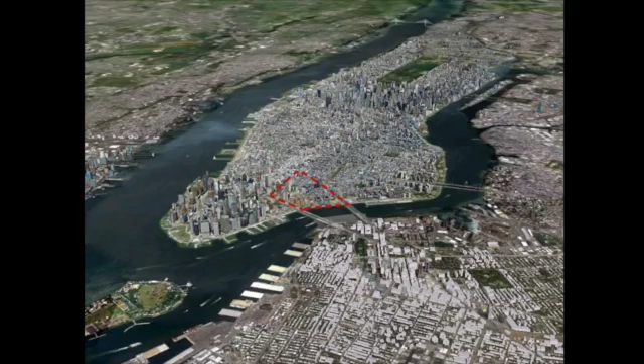We started by looking at anticipated flooding in this area, where it would go and what that meant. You can see in the medium dark blue the 6-foot sea level rise that's predicted, and then in the lightest blue, the 24-foot storm surge that would accompany a Category 4 hurricane.

What would happen is that water would come in from the left from the Hudson River and then up from the East River and converge on our site. We overlaid that analysis with the historic location of Collect Pond, which you can see in the middle in dark blue, which was the original fresh water source for New York City, along with all of its neighboring streams. What you see is that where the water wants to go today is actually where the water had been before.

To make this happen, Collect Park is designed on the premise of removing the seawall along the East River. Today, the East River edge cannot naturally respond to sea level rise.

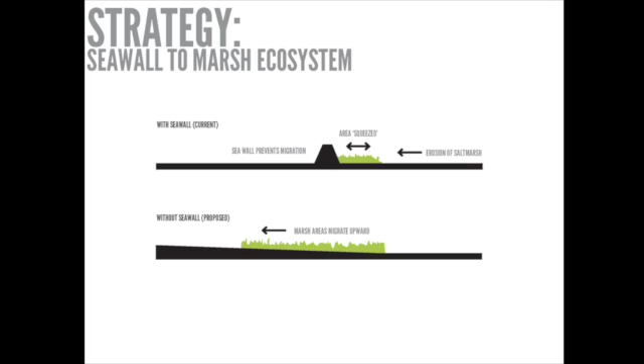The existing seawall continues to create a false sense of security and actually speeds up the erosion of any barrier landscape that would appear. So without the barrier, the natural buffering marsh ecosystem will appear.

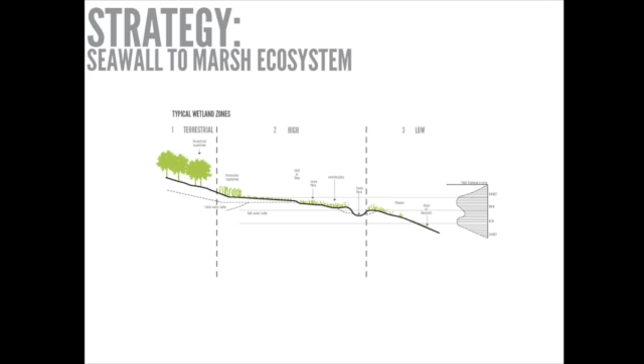When you allow this to happen in a typical situation, three ecologic zones appear: a terrestrial zone, a high marsh, and a low marsh. The cohesion of these three zones allows this system to work seamlessly and functions to buffer storms, allow tidal changes, filter pollutants, and provide natural habitats.

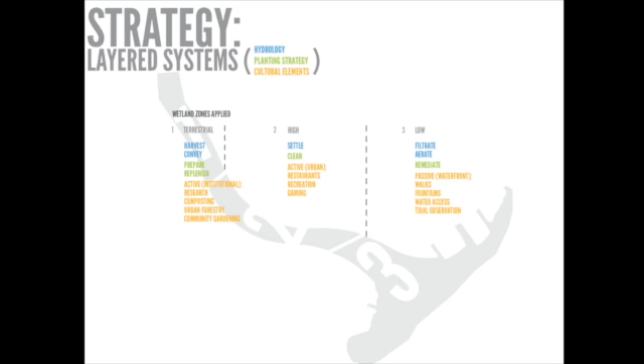So Collect Park, outlined in dark gray behind, became a system modeled after the function of these three naturally occurring ecological zones. Each zone—the terrestrial, high, and low—is multi-layered, not only to respond to hydrology and plant ecology, but also to the cultural and programmatic needs of this community, which is the Two Bridges neighborhood in New York City.

You can see the master plan is a direct translation of these designed elements. Up at the top, number 1 is the terrestrial zone, which captures and conveys stormwater. Number 2 in the middle is the high marsh, which receives fresh water. And number 3, along the East River, is the low marsh, which filtrates and aerates the water in this more constructed and managed marsh condition along the river.

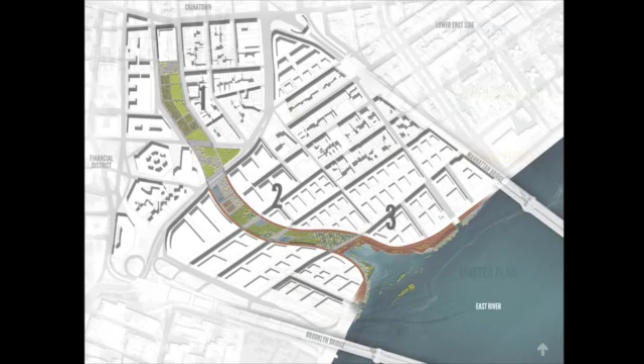We took each of these systems and broke it out and developed it further. Hydrology became the core defining system, closely paired with a planting strategy, and also a significant index of cultural elements to connect back to the neighborhood.

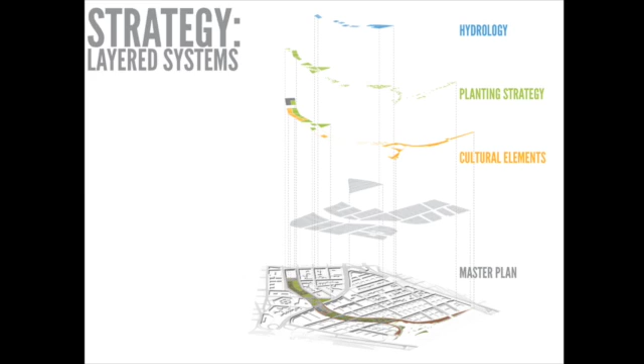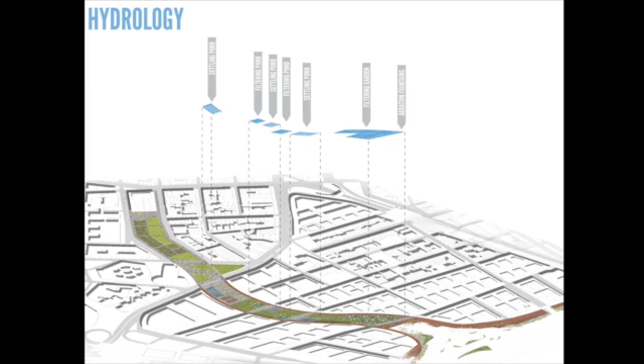Hydrology was really the main core infrastructure, designed to accept rainfall from above and accept flooding from below. This diagram shows we designed alternating settling and filtering ponds to accept rainwater, and then the constructed marsh, down on the lower right, accepts the floodwater that would flow up Collect Park.

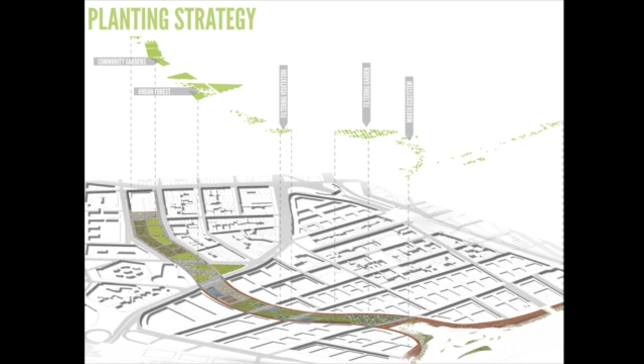We also introduced a phased planting strategy, characterized by responsive growth and management throughout the park. The terrestrial vegetation included an urban forest, capable of being transplanted after a flooding event to replace lost vegetation, and the marsh ecosystem at the bottom eventually gets pushed upland as sea level rise occurs.

The plants were chosen specifically for their transplantability, salt tolerance, and growth rate, and we cross-referenced all those to find a perfect match. The trees grown in the urban forest would be able to be replanted to replenish lost vegetation after a flood and begin the remediation process of any polluted soil and sediment.

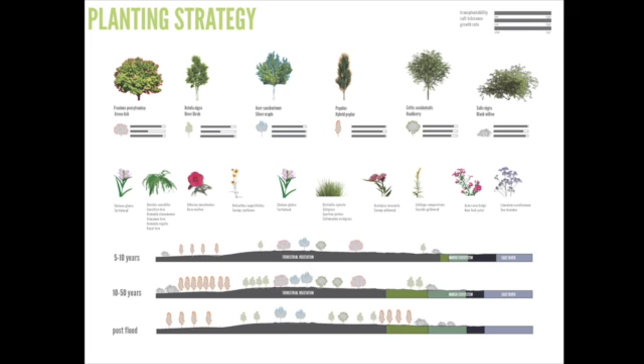We phased that, as you can see in the diagram at the bottom, and this was a representation of that phasing. In 5 to 10 years, you have the islands off the edge of Collect Park initially, and then between 10 and 50 years, you have the marsh condition, which moves in and takes over and becomes the buffering landscape.

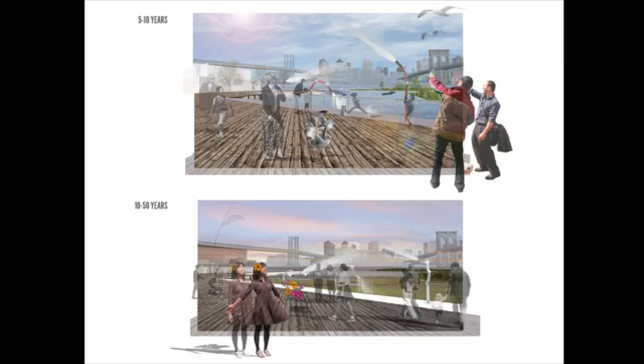We also introduced a number of cultural elements, including a newly activated edge with a kayak launch, docks, a promenade, and an interactive fountain which also aerates the water before it goes into the East River. Then we have plaza space in the middle for farmers markets, outdoor space for residents and employees.

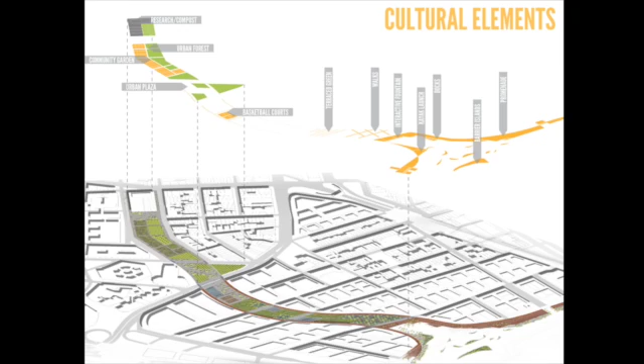We introduced some sport fields, multi-sport fields. Here you can see the farmers market location.

We also proposed the location for a climate change research center, which would serve as a hub and a partner for an urban agriculture initiative, which would include greenhouses, indoor composting, and community gardens as well.

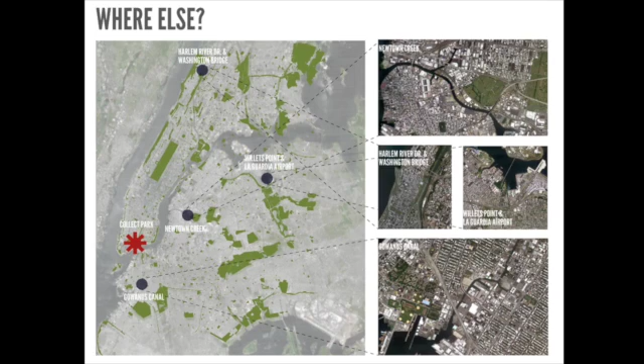We recognize that sea level rise is obviously not an issue just for Lower Manhattan, so we used Collect Park as a prototype for similarly threatened neighborhoods in New York City, and we located other sites with similar issues such as Newtown Creek, the Harlem River, Willets Point, and the Gowanus Canal, which could all utilize intercity green infrastructure as an innovative solution to the consequences of sea level rise.

This is the Barcelona Pavilion, shown in its natural habitat. The two types of tourists I saw were those enjoying the beautiful afternoon and the physical environment of the building, and then there were the architects who were laying on the ground taking pictures from a worm's eye perspective. I was completely confused by this because there literally were people laying on the ground all over the place.

My contribution in the lobby for the GSD 075 exhibit juxtaposes abstract animations from my first-year studio at the GSD with footage from Extreme Home Makeover. The point of this, as described in the text that accompanies the exhibit, is to provoke us into reflecting on the consequences of generating a culture of architecture on our own terms that operates outside of the economy of the built environment. While I think an internal dialogue is necessary to advance the discipline, I think it's worth keeping in mind that this is not always directly applicable to the project of building.

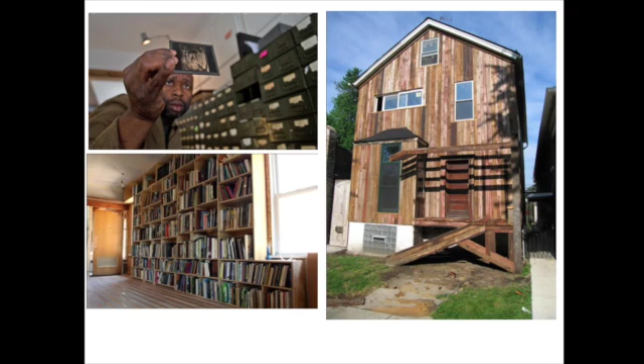He rehabbed the abandoned building into a library containing 60,000 art history slides that were being thrown away by the University of Chicago, and the entire collection from Prairie Avenue Bookstore that went out of business, of art and architecture books. Four of us went there over the summer to work as architectural practitioners. He gave us free housing, almost no money, and total creative control. So it was a very challenging and rewarding summer.

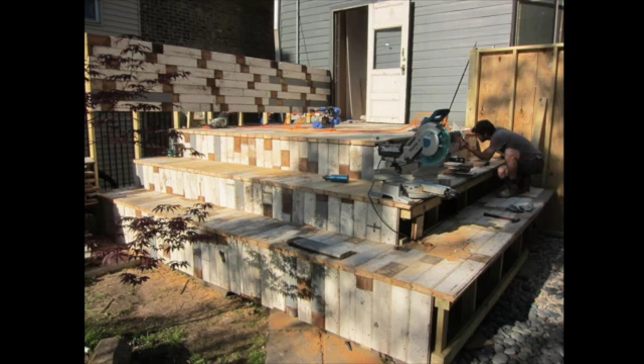The ethos that runs through all of this comes from his art practice, where you find something discarded and turn it into something else. So these were floorboards from his studio that became a back deck. And the back deck in this backyard became a movie theater for an artist residency that took place over the summer, for the neighbors to see lost films that the Chicago Film Archive was curating, displaying, and showing to people. We were trying to bring this kind of cultural activity into a neighborhood that rarely sees that kind of work.

This routine site work we had to do for a future construction site was the removal of a 100-foot rotten silver maple. Instead of just letting this kind of banal act go unnoticed, we turned it into a several-week-long camp for the neighborhood kids.

Because as designers, we're constantly representing sort of unspoken narratives, we decided that we could use this as an opportunity to speak the narrative of the ecology of a neighborhood like that, and have the kids learn about the parts of the tree, talk about where wood comes from, talk about where paper comes from, and think about how to play differently in their own backyards.

And so that's actually a piece of the tree. For the week leading up to it, we did activities with them every single day that had to do with learning about different parts of the urban ecology right around their own homes, and also the animals that live there, and thinking about the way that it was a member of their community.

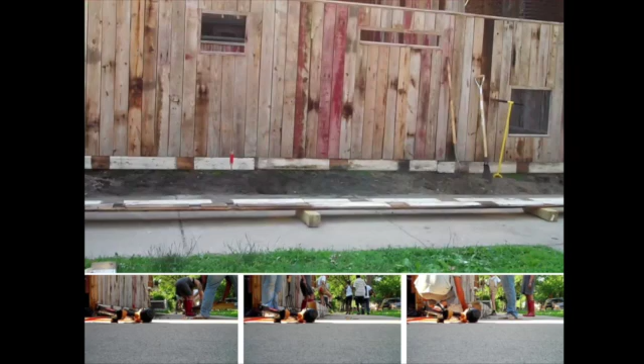And we tried to endow them with some sense of systems thinking, of finding treasure out of trash. This discarded little strip of dirt in front of the fence, we decided, could be a demonstration garden for low-maintenance perennials.

Doing work in front of your house on the South Side, people will constantly come ask you questions, like, what's that? What are you doing? What are those plants? It was just this moment where we could share all the knowledge that we had about planting and using discarded materials to create something more vibrant on this block that was kind of just littered with flaming hot Cheeto bags.

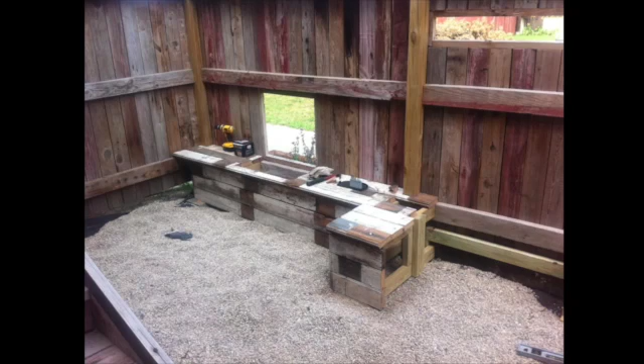So what else? This piece of dirt on the other side of the fence is in front of the library, and it's this pseudo-public space that we just decided really needed to be something more, especially for an organization that functions as both private and public space. Just a little bit of framing, the rest of the cladding from the deck, and a cubic yard of gravel. We were trying to find a way to make it a viable space for neighbors to come and hang out without being invited in necessarily.

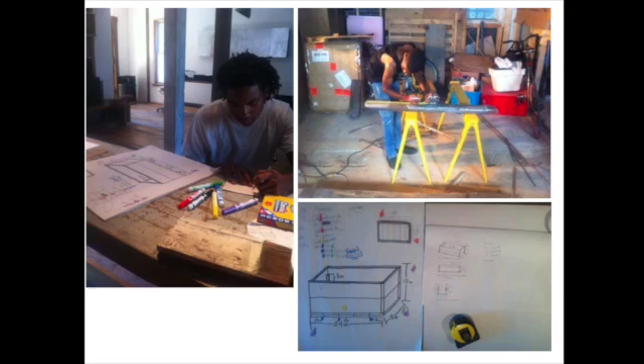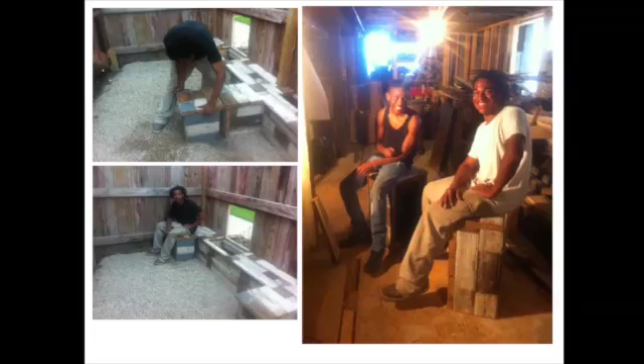The design and building of this included hiring two neighbors from down the street, a 16-year-old and a 19-year-old, who rather than just paying them to lug around wood, we treated it like a design build workshop. We had them draw their ideas, switch their drawings, and build each other's drawings. They stayed late for hours they weren't being paid, and it's amazing how quickly you can make somebody become totally anal retentive and perfectionist about what they're building. They had never picked up a power tool before, and by the end they were cutting and recutting, tearing apart things they had made if they weren't satisfied, and rebuilding.

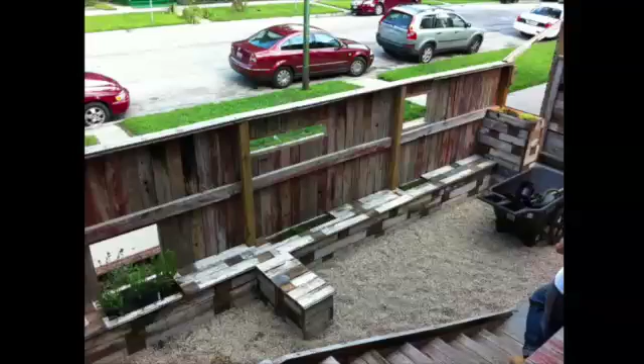So really looking at architecture as community service, my insight from the summer is that every single moment of architecture can be neighborly, didactic, and transparent. It can be a generative process throughout every design stage and every building stage, and you end up with a really rich product that is also a shared story and a shared history in a community where people have participated in its conception and its building.

There's an outdoor classroom where there was nothing but dirt and mosquitoes, windows where there would normally be a fence, and conversations where there would normally be silence. It can transform vacancy into vibrancy, yard waste into keepsakes, nothing into something. So I would like to leave you with the idea that architecture finds abandonment and sees opportunity.

As a graduate of this school, I'm happy to be here with you today. I'm going to speak about an ambitiously modest design-build project from my practice, inasmuch as it illustrates aspects of my research and publications that deal with energy as a formal topic in the discipline of architecture. There are a couple of key observations.

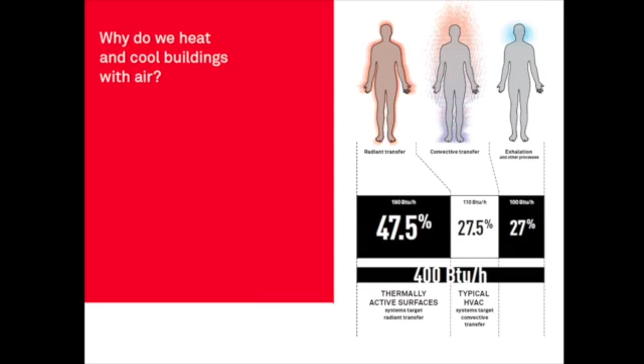Why do we heat and cool buildings with air? Our physiology strongly prefers radiant transfer, and our bodies work this way because water is about 800 times more dense than air, and you can capture and channel much more energy with water. As such, our bodies are thermally active surfaces, and it is my view that buildings should finally occupy the same thermodynamic space as our bodies.

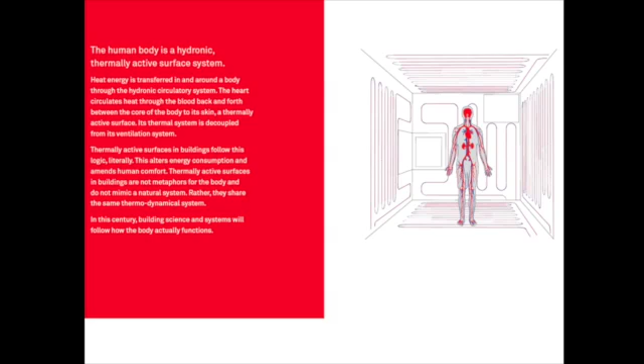The book thus asks what happens when the surfaces and structures of architecture also become the primary energy system in buildings, that is, when architecture begins to do much more work.

My current book project focuses on aspects of architecture that have been untempered by the discipline, such as its extensive supply chains and material geographies, that also tell us something about building physics that have been overlooked in the 20th century. These untempered milieus can grant much new agency and specificity to architecture.

For instance, while the stunning glass architecture of the Toledo Glass Pavilion, which is coming up, produces some beautiful spaces, its supply chains are vulgar inasmuch as they squander opportunities to enrich the building and the larger collective that we live in through productive feedback loops that can make architecture do more as a form in this century.

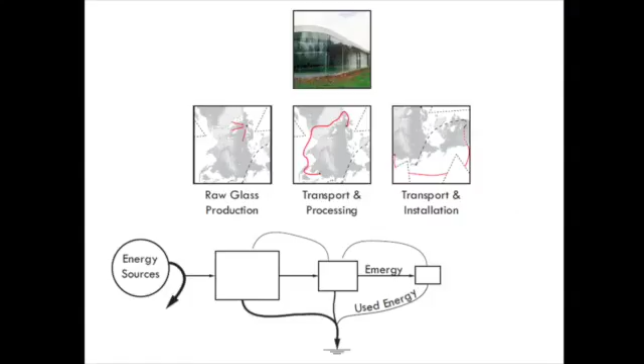So with some of these thoughts in mind, we can go to the middle of nowhere in Colorado and look at the Stackhouse project that sits on a hill and overlooks the Arkansas River Valley and the 14,000-foot collegiate peaks beyond. The building is seemingly simple, a couple of wood walls with steel boxes that frame particular views in the adjacent landscape. There's not much to see in the drawings of this small building.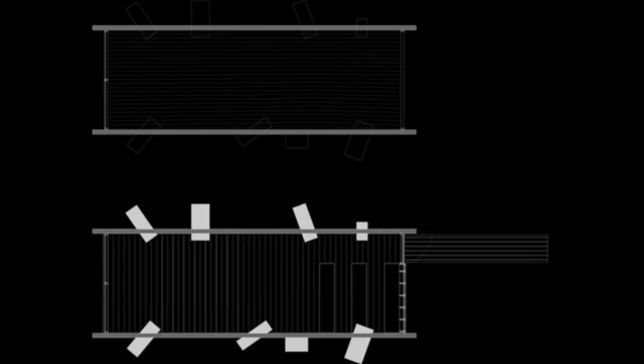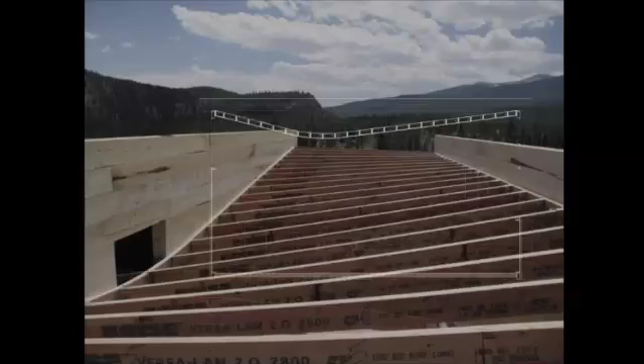Most of its intricacy is non-visual. The roof, however, is a ruled surface, which means that every joist is different than the one before and after it. So one side of the roof is dead flat, while the other side has an asymmetrical belly leading to a scupper. This allows the roof to drain snow and rain to the scupper as a single architectural surface.

It also made the roof part skate park during the construction. Underneath the asymmetrical belly of the roof, it casts light about the interior, and it also bounces sound in a particular way as a space for performance and music.

But it is the assembly of the building that is of most interest to me. The walls for this project are a single layer of solid 6x8 spruce timbers that are the structure, enclosure, insulation, and finish materials of the project. All of the wall's demands are converged in this one layer, an approach that runs counter to prevailing logics of construction and energy systems for buildings today.

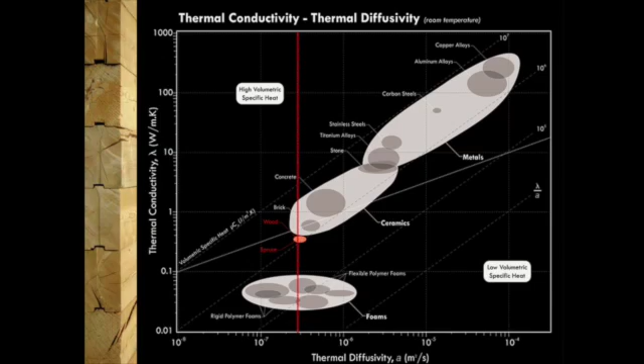Once the timbers are stacked, their thermal performance becomes important. The spruce material is quite interesting from a thermal point of view because its cellular solid composition puts it somewhere between an insulator like a foam and more conductive materials like stone or steel. This thermal diffusivity, a parameter often ignored in contemporary building science, plays an important role in the Stackhouse.

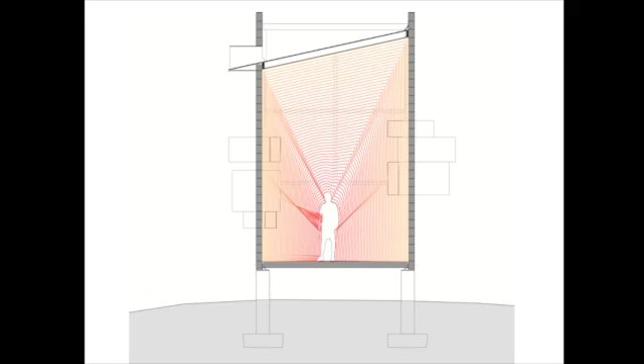Although this building would fail to meet any energy code, the owner can sit inside wearing a t-shirt and shorts with no heat source other than the sun in mid-February when it is 10 below outside. How thermal energy behaves in wood and how our bodies relate to wood helps point to an alternate modality for thinking about the relationship of energy and architecture.

But there are other forms of energy at stake in this project. Consider a more conventional wall that has a series of processes attached to it, some quite energy intensive, that collectively produce a rather dispersed material geography that is rarely considered by architects, but nonetheless inextricably attached to this form of architecture. In this case of lumber construction, it would yield a relatively high embodied energy value.

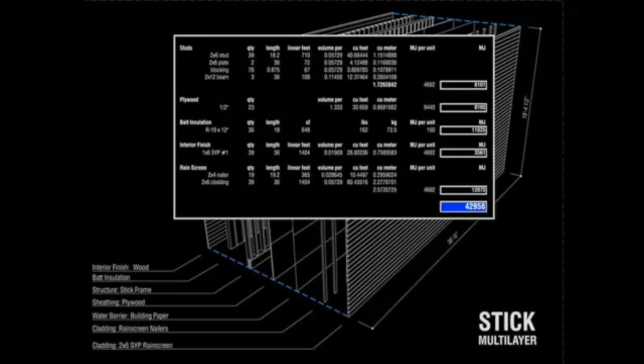In the stack approach, however, the single material allows me to know much more about the wall. For instance, the spruce for this project was grown, harvested, processed, and installed in the same valley as the project, and as such, it yields a much lower embodied energy value.

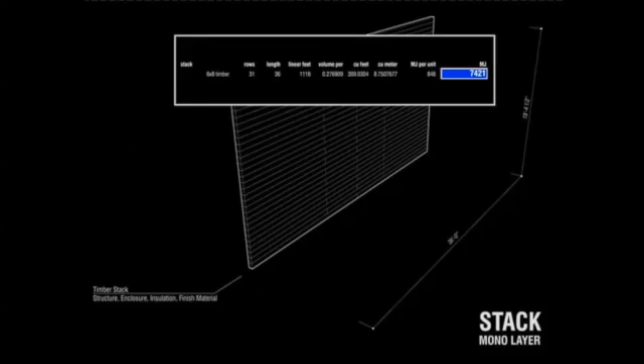But I'm only interested in these sorts of facts in a very marginal way. What is of greater concern to me as an architect is how these facts can affect the building. In this case, more money, material, and energy was lavished on the building than its externalities. It also enables specific architectural qualities that would otherwise be precluded.

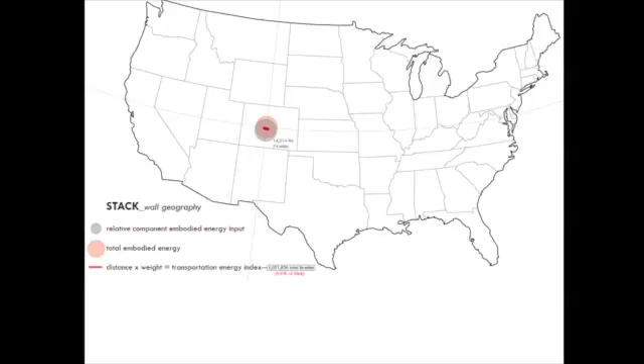Yet my disciplinary concerns can nonetheless address some larger issues in the world. For instance, wood is the only building material that sequesters carbon. As a tree grows, it absorbs carbon, and that carbon is locked in the material until it decomposes or burns.

If you deduct from that capacity the carbon required for all the materials in this building, then you end up with a surplus of sequestered carbon in this case. In other words, this net zero building sequesters about twice as much carbon as it took to build.

But again, I'm only interested in these facts in as much as they yield some more agency and specificity for architecture. This building works the way it does not because of any efficiencies. It is a massively inefficient use of material. So it fundamentally reflects an approach to architecture not based on ideas of scarcity, but rather one that aims for abundance and exuberance in architecture.

And this occurs because its ecological facts are byproducts of its disciplinary choices. From the molecular realm of building physics to the territorial realm of its extensive architecture, there's much to be gained for architects when they temper these otherwise untempered environments.

So as Rem Koolhaas once noted, the architect, for better or for worse, relates to the city like a surfer to the wave. But architecture and architects do not yet relate to the world like a surfer to the wave. They do not surf the wake of the materials and energies that presuppose the formation and construction of any building.

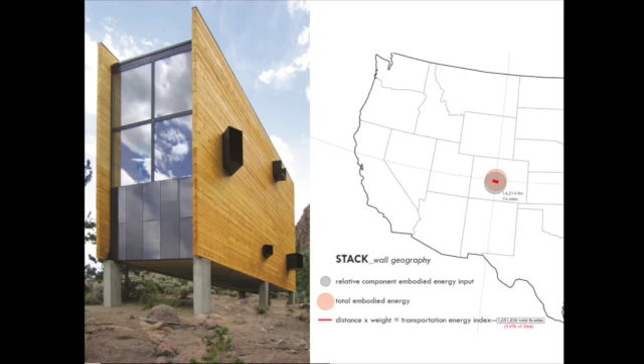I see this formation of energy itself, how architects shape forms of energy, towards some greater end, first and foremost as a formal project within the discipline of architecture. It can yield non-trivial forms that can trigger great abundance and exuberance for both architecture and the qualities of life in this century. Thank you.

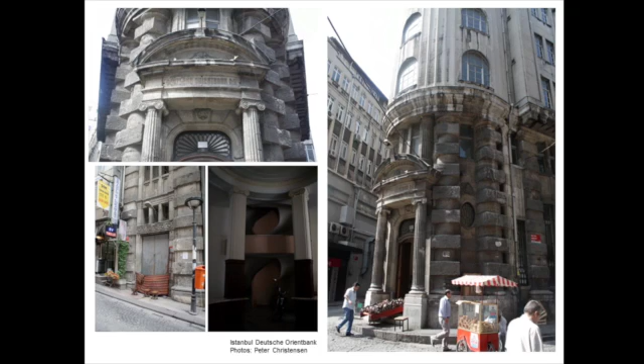It explicated, rather, German ideas of the primacy of land over water, of the necessity of geopolitical alliances, and a shifting belief that the cradle of civilization lay in the Middle East and not in Greece. The built components of the railway read, like their archives, as texts, which I hope have the promise to make an original contribution to architectural, art, and geopolitical history, and hopefully one day the ingredients of my first non-museum publication.

When I explain this project, as I have so often done in the last few years, the reaction is typically met with two types of responses. The first, from my academic peers, who ask probing questions concerning specific figures, ideologies, or historical debates. The second, which I may call the grandma and grandpa question, is, so what? My knee-jerk reaction after a few years of academic indoctrination is to say there is no, quote, utility for this project beyond the gaps it will fill in the body of knowledge that exists on our built environment.

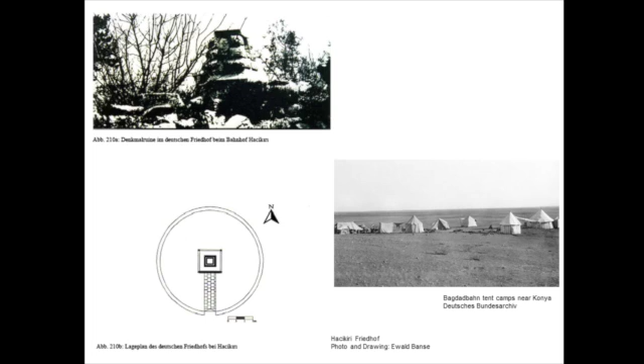But such a response would not be acceptable at the GSD. To be sure, knowledge is treasured here and the production of it is a noble pursuit, but it cannot exist in a vacuum when one is surrounded by designers of all stripes. It must relate to their work, to today, to our contemporary political and architectural understanding of the Middle East, of Germany, and well beyond. To be forced to think on these questions, to not be self-satisfied, to converge knowledge, design, and representation with nuance and aplomb is to operate in a quintessentially GSD mode of alertness and to buck convention. Thank you very much.

And here's some shots from my field research.

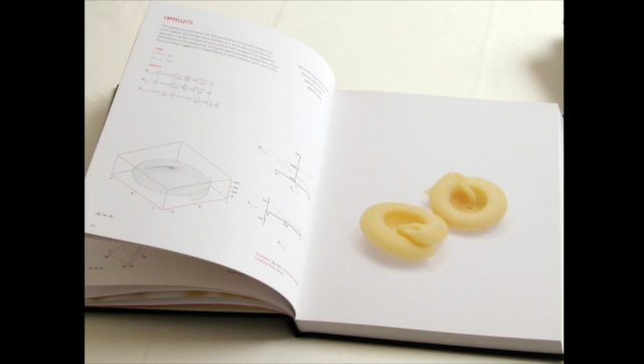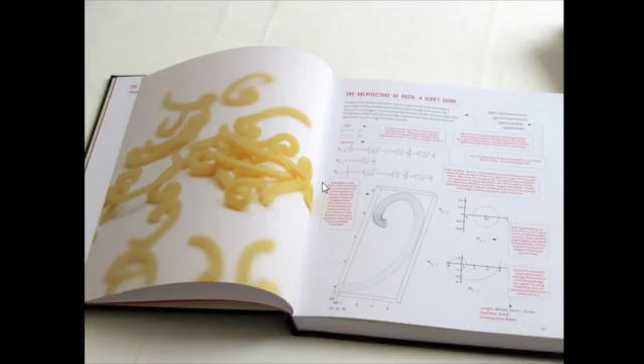Which technical advance excites me the most? Hempcrete, a new material we used for the bathhouse in the London Wetland Centre in 2009. Hempcrete is both primitive and advanced. A person patting a mix of hemp and lime with a wood stick can build a two-story high load-bearing wall, just like my great-great-grandfather did.

There is, of course, no such thing as a freestanding 600-foot-tall billboard. Flatness would preclude all manner of stability, and the wind shear would finish the job in seconds. In our own entry, we used mathematics to deform the surface into stability. The ratio of the fold's width to height is about 1 to 12, a working high-rise ratio.

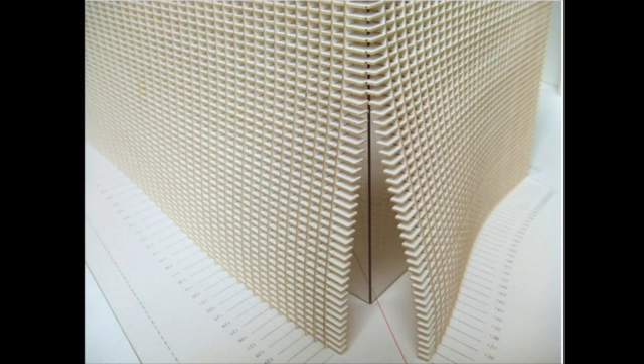We love boxes in my office, but are equally committed to tackling the challenge of continuity, which gets tricky when mundane orthogonality is concerned. We tend to avoid piecemeal assemblies, for instance, where each side is dealt with separately, considering instead alternative options, all of which produce bona fide blobs trying to pass themselves off as a box.

I don't get the physical side of structure, but I have a good sense for its math. Math is only a game, after all, a risky game perhaps, at which our academic standing may be gambled away in no time, but a game nonetheless, whereas physics is a fact of life. Without it, buildings would collapse and we'd have nowhere to live.

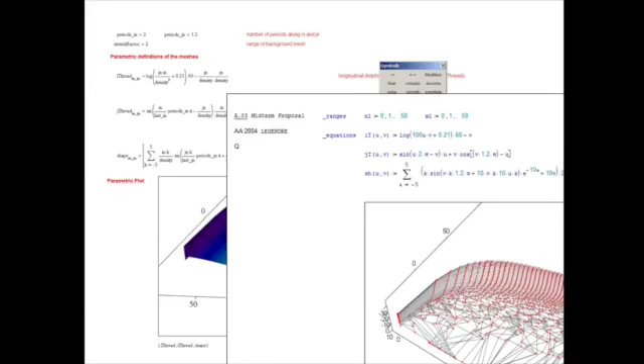When the engineer is a closet architect and the architect a closet engineer, the dialogue is tricky. Architects enjoy the artificial side of complexity, and hence, with its emphasis on material and economic behavior, the maturity of the engineering profession may forever elude us, along with its social standing and very high fees.

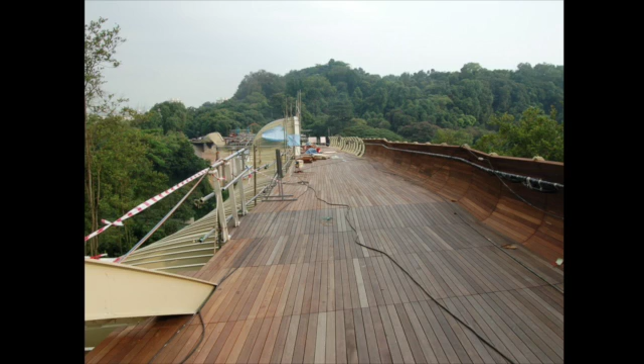My work is about novelty as well as type in the most traditional sense. But unlike the conspicuous types of the past, our new types are abstract and invisible. We do not recombine them, for instance, to make new projects, but calibrate relationships expressed for the sake of convenience in mathematical terms.

The brief of Henderson Waves is simple: to spring from a scenic point and land on a hill some 1,000 feet away. This picture was taken near the springing point, looking opposite. Bridges have typically simple briefs: to go from A to B. But our own internal brief was even simpler than that: to get there with one equation only.

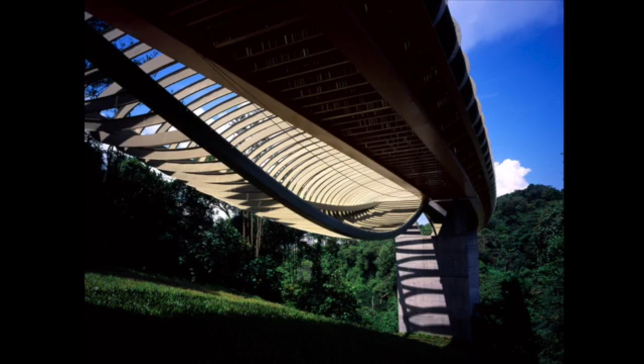Using equations, we can write anything we want. Some results may remind us of forms derived by more traditional means, say by using Rhino or Maya. Where there is nothing, everything's possible, but here structure carried the day. This proved a sensible choice in hindsight, for having won the competition, we were also required to build it.

To remain within the prescribed slope, the bridge bends while undulating. It deforms to provide access, shelter, scenic viewing for pedestrians, runners, and cyclists. The length of the deck exceeds 1,000 feet, and the difference in elevation between springing and landing is about the height of a 7-story block.

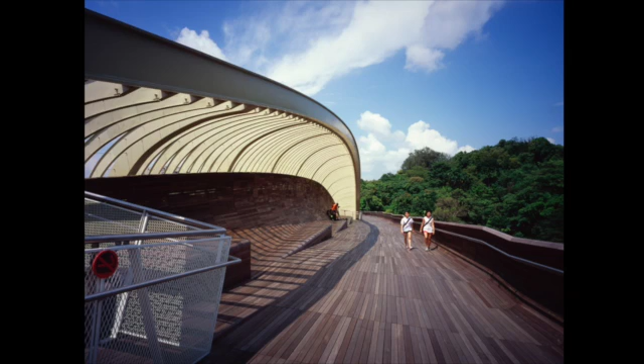Since opening in 2008, it has received over 1 million visitors. It's become a suburban park with stunning views of the South China Sea, a favorite family destination, a romantic hideout, and the outdoors wedding venue of choice. Its giddy height may even be the safest venue to walk a Cairn Terrier or any other very small dog breed.

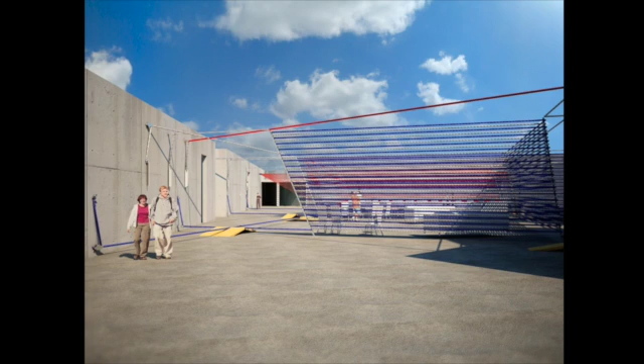Our entry for MoMA PS1 is about domesticity. In other words, it pitches the bustling excitement of contemporary space against the enduring yearning for a log cabin in the woods. This courtyard celebrates the spirit of modern living, in keeping with the now aesthetic.

There are no doors or windows here. Visitors enter or exit through missing walls. This courtyard accommodates a structure that gives the project its name, the Ghost House. Here we strove to create what you would readily recognize as a house. But given our strategy of tensioning ropes between concrete walls, our low-fidelity house offers only the minimum features of houseness: a pitched roof and an eave.

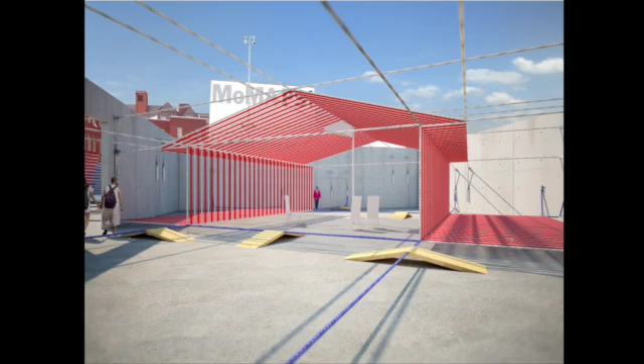Despite appearances to the contrary, 97% of the proposal is made of polypropylene. Polypropylene is a light but tough plastic polymer, commonly used in clothing. In 1995, the artists Christo and Jeanne-Claude used the same braid to wrap up the Reichstag.

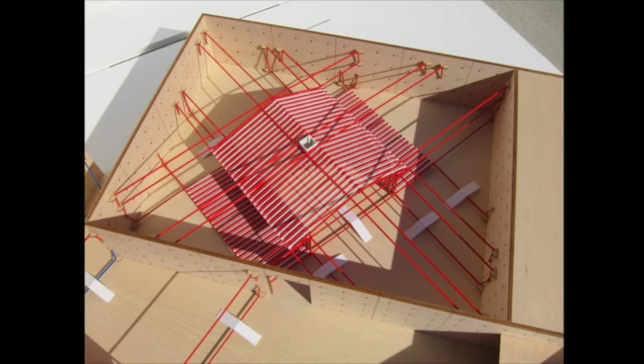Our Shenzhen Museum uses the elastic properties of a parametric surface known as the implicit field. By aggregating functions, the implicit field is defined by the discontinuities between them. It's also the basis for a building, deriving its structure, layout, and access to natural light wherever such discontinuities occur.

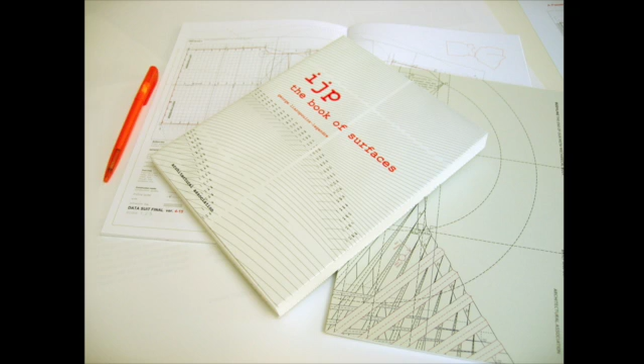And finally, an old novel in which the same meaningless event is retold in various dialects inspired my first foray into the surface in 2003. Here too, the surface appears in many guises, each using another vernacular, like the language of computation, for instance. Eventually, I wrote a recipe with functions for cooking ingredients. 8 years, 6 minutes, and 40 seconds later, we've just come full circle.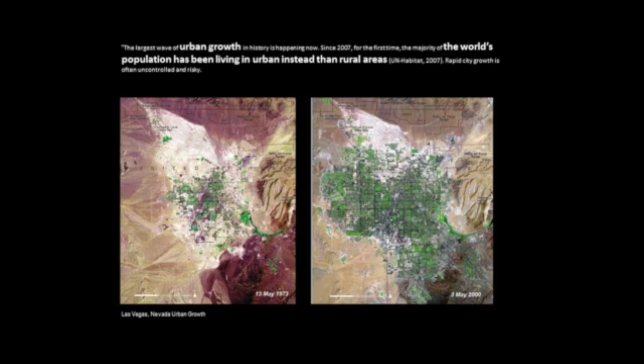Let me give you a little background to understand what ecological urbanism is trying to respond to. We find massive growth of global population as well as urban growth, shown above generally in the form of old or traditional planning in developed countries. But we also find that 90% of this growth is happening in emerging countries, in what could be called the informal city, or non-formal. Either of these situations is leading to a massive use of resources, posing the question of how we are going to address scarcity.

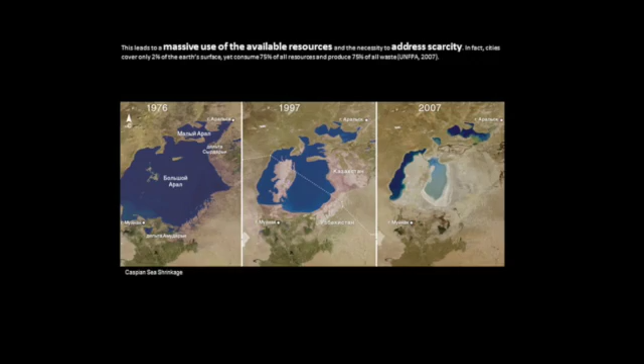At the same time, this leads to environmental exploitation and consequent ecological disasters generally associated with urban habitats, for example the dead zone around the Mississippi River Delta or the Gulf oil spill, just to mention one very representative case.

But it's not all about bad news. As Mostafavi said, we need to view this fragility of the planet and its resources as an opportunity for speculative design innovation rather than promoting conventional solutions. He also writes: imagining an urbanism that is other than the status quo requires a new sensibility, one that has the capacity to incorporate and accommodate the inherent conflictual conditions between ecology and urbanism. It's a very deep theme with many other issues, but for a 90 seconds express introduction, I think that's fair enough.

Based on these facts and others, the GSD organized in 2009 the Ecological Urbanism Conference, inviting worldwide experts to lead the discussion around these issues. Coupled with this series of lectures, the GSD also curated an exhibition showing different perspectives and ideas under this topic of ecological urbanism, posing the question: can urbanism ever be ecological?

About a year later, collecting all the information produced, the Ecological Urbanism book brought together practitioners, theorists, economists, engineers, artists, policymakers, and so on, with the goal of providing a multi-layered, diverse and nuanced understanding of ecological urbanism through a series of essays. So what's next? With an archive of more than 7,000 images and over 100 essays, what should be done?

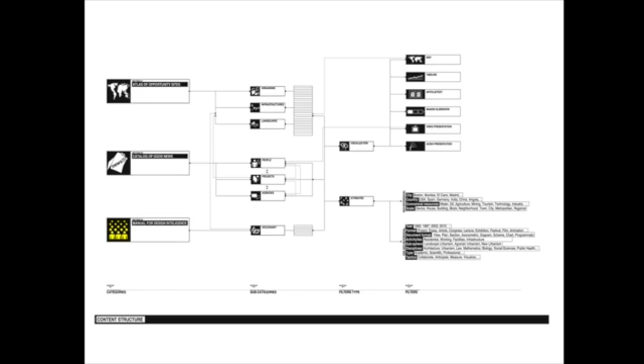So let me navigate you through the first design compositions that we have so far. This is the first design composition we are working with - a way one could visualize one piece of content. As you can see, it will allow you to collect a bunch of media like images, videos, graphs, postcards.

At the same time, it will include a description, either a little text or an article, complemented with a detailed tagging system of attributes and a little map that locates it geographically and links you with this.

That is a first version of what is meant to be the Atlas, that will compile geographically and order all the content, but also will allow you to zoom in and zoom out to areas of interest, conflict, potentiality, or the project itself. The second type of visualization we are proposing is what we call the matrix, and right now it's still under design.

This is the first design composition, but it's meant to be a graphical display that would allow us to organize all the projects according to one, two, or three variables chosen by the user.

So as you can see here, only the projects are displayed by time, but we can add another variable to the graph that converts the timeline into a matrix where content is interactively rearranged - which is especially interesting in the way we are learning just by how information is displayed. We could see if one year was especially intense, or understand the scale of a project according to time.

Another feature we are developing would allow the user not only to rearrange the content in different manners, but also to specialize their search by a complete attribute system - for example economical resources, disciplines related, authors, density, the type of sphere - that will pop in and pop out by simply selecting tags related to your selection.

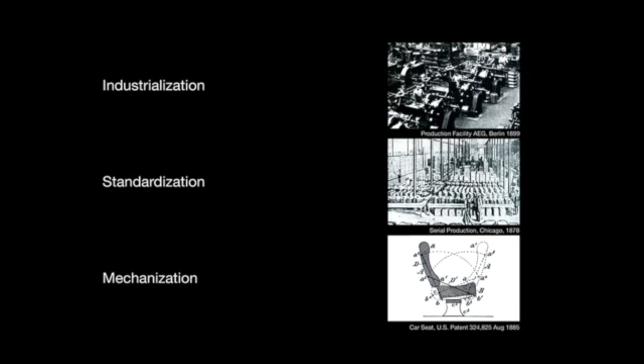Now, as we all know and have heard about the era of the modern architects, they rather liked to clad brick with white material, or alternatively undo it altogether. So this highly, increasingly engineered brick, I think - and this is my argument - would be no longer of relevance today.

So the question is, what is the role of brick today? I would suggest brick is on the brink, given that we are no longer necessarily using mass production, but rather mass customization. So the seminar looks into technology, latest computation, and how far that causes us to rethink the unit and the standardization of it.

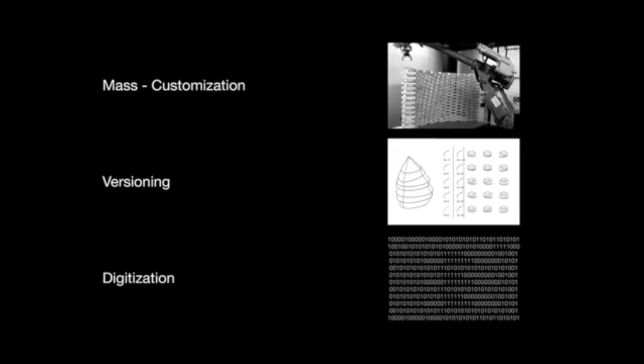This is a speculation. It's a speculation in and through design. We try to be rigorous as we do this.

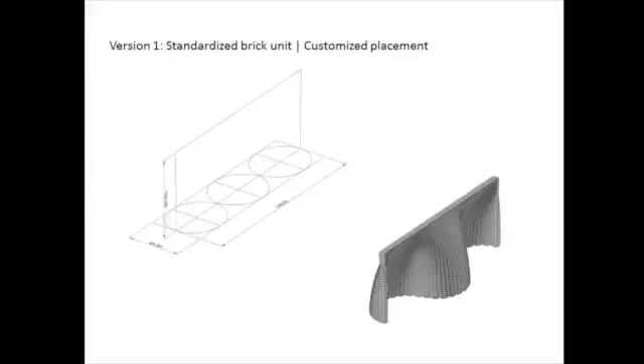In this case, for example, we looked at the wall and the typology of the wall, and looked at how far through computational means we could stretch the running bond, and by doing this also increase the stability of this wall. Obviously, this is also based on research already done at ETH Zurich, Gramazio Kohler, you probably know. Nevertheless, for us, this was very important also to tackle the typology of the wall.

So it's a combination of a bottom-up and a top-down approach. Computation helps us here to place the brick successively equal. It's a straight line on top, and it's bulging out, creating actually an inhabitable space in between the two walls.

Now, the computer, and this is the fabrication lab downstairs, you probably have seen it today. Martin Bechtold probably showed some of these images already, helped us to conceptualize not only the piece of work, but also to actually build it and realize it.

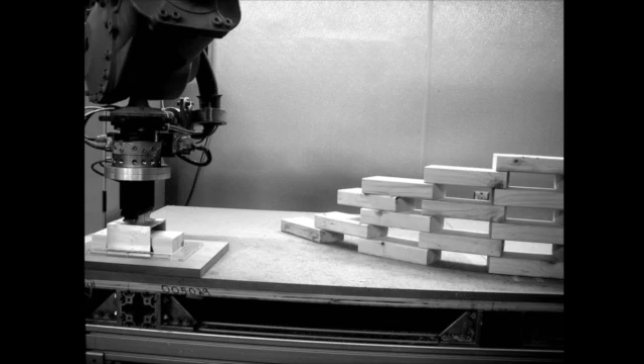We had to build it in wooden bricks simply because of the weight of the real bricks. One challenge was to transfer the design into coordinates which the robotic arm could pick up. We had a zero point, which you see on the left side, which then successively allowed us to build 12 units, which then became assembled in the pit.

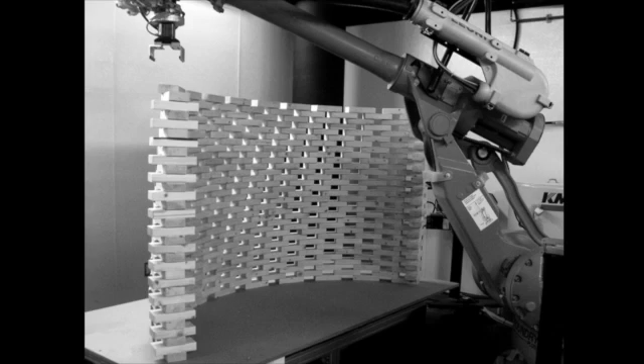Here you see how the robotic arm successively builds up the brick. The brick is glued, mortar is passé in this case. We had some trouble ensuring the precision, which had to do with how much glue you put onto the bricks. It was still a little bit of a hand operation, as we more or less had to hand deliver the bricks to the location of the pickup. Here you see the action.

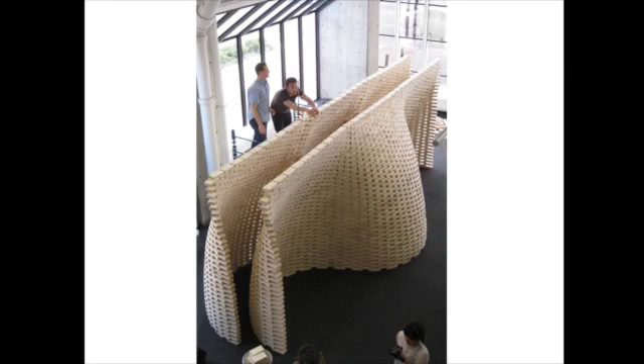The project is not only a research or design-oriented research project, but it's also very much a community project where students come together and work together. This was a team of 30 people in the end working on this piece, and it created friendships throughout one particular year here, which still are in place.

Now, this is still a repetition of the same unit. It's a uniform unit, yet it's a variation in its placement. The second approach was we vary everything. It's like a customized unit, and it is a customization of how the unit is placed.

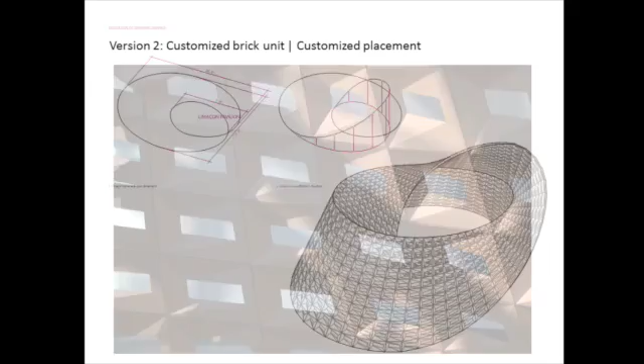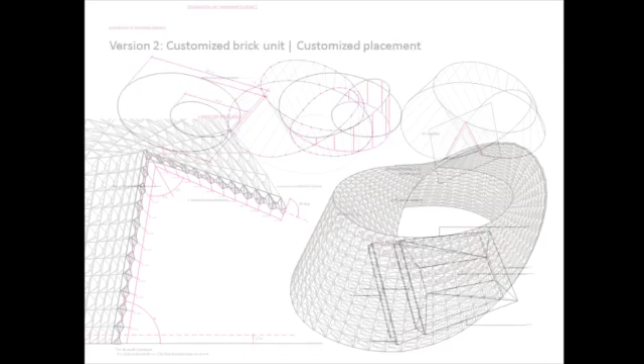In this case, and this has limits obviously, it was a point to show students how much hassle you actually go through by mass customizing everything, because there's a great myth at this point that we can just differentiate anything and showcase it to the world. So they had to literally build all these units, and they realized it's not necessarily totally handy to have every single unit being different. So our next approach will be to look at clusters and standardize again parts of those.

Nevertheless, this was a surface which was very easily generated. It is a Limaçon surface which has the elegance that one equation actually generates it, more or less generated through two circles which are rolling around each other, and then there is a radius which can vary, which then defines the curvature.

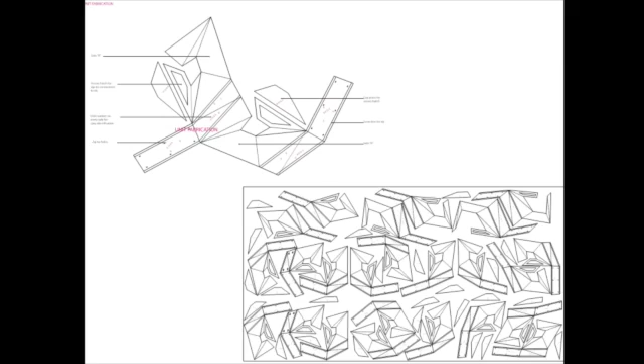So I have to speed up, obviously. This is already then the other economy we had to deal with - how do we make that unit, and how do we place the unit so that we save material? The units were made out of cardboard, due to cost, but also for the pleasure of it - how can you make out of a 2D something 3-dimensional? Those are the units finally assembled as a unit, but still left open. You see on the right side a little tab in order to assemble them then totally.

Again, a great amount of students were involved. Mohsen came by when we labored here late nights. It was an incredible sight at the pit. Here we put this rather fragile structure together.

We learned our lessons. We will have to make a mock-up next time, 1-to-1, before we go into full production. Simply, gravity hit us severely. The piece was up for review, but collapsed shortly afterwards.

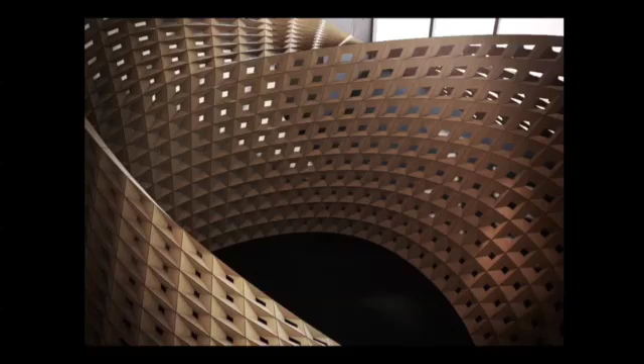But we have a beautiful rendering, and this is it, which reminds of its idealized final stage. So I would like to put forward architecture or design as such, as a speculation, as a great resource for research in its own right. Design is research. Thank you.

So they made it look really easy. Some of them used some techniques, actually, to add more slides, I noticed. Very clever.

Anyway, I'm very impressed. I think this is quite an effective communications device. I know you've just seen a breadth of work that is extraordinary in its range, in its difference. I think it's an amazing snapshot of the school. Please ask them questions, or if any of you felt cheated by your limited time, you're welcome to add some comments now.